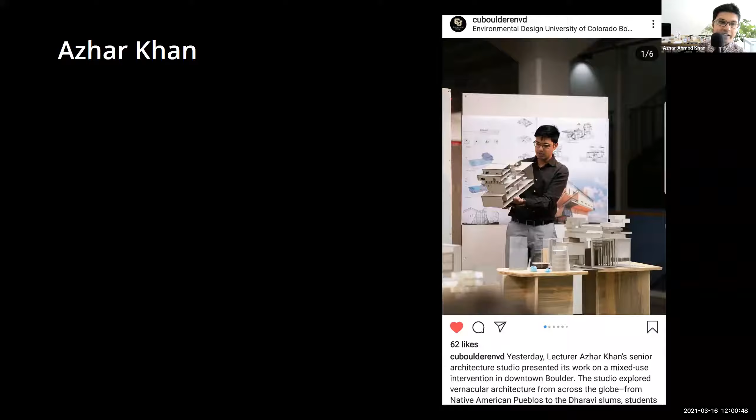Let me see, I think there's an image that's not showing here, but I'll show that in a second. So my name is Azhar Khan, and I consider myself a computational designer, because almost any work that I'm usually asked to do for any kind of project has to do with computational design. For years, that's pretty much all I've been doing. I got my master's here at UF in 2013. I used to be a TA for advanced digital, the very course you're taking right now. I think back in 2012 or so, I was a TA for it, so that was a lot of fun.

I currently teach architecture and product design at CU Boulder. So it's kind of weird, started off as a student and the loop has come back around. And yeah, so I teach design studio over here now.

I also have a lot of on-demand courses that I teach at a website called the Lineweights Academy, where people learn things like Rhino, Grasshopper, Ladybug, and other courses that I'm coming out with. I also train architects one-on-one, because there's only so much you can do online. So there's a lot of people out there who want to learn more about this information now.

I also have a coaching program where I spend about 8 to 12 weeks with someone, working with them one-on-one on how to actually implement some of this stuff into their firms. So it's not just them working alone, but how they can create teams, train other people, and make this part of their office culture.

And also freelance. So I get called from time to time to work on projects I've been working on for a couple of years, or even some new stuff every now and then.

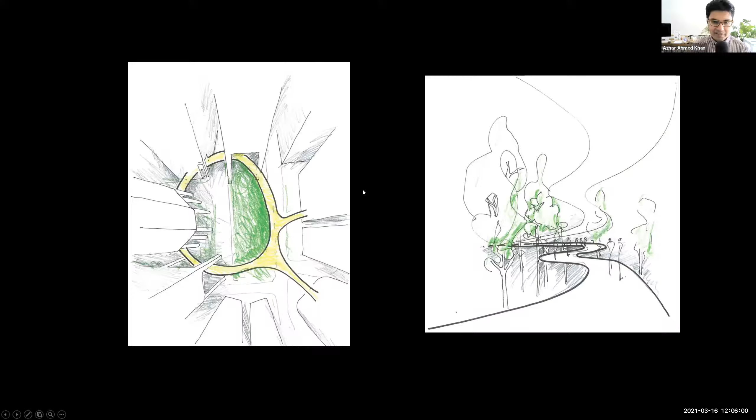And then there's a new building here and a new building here, which also has its own thing. So this bridge isn't just one straight thing, right? It's kind of going up and down. It has to navigate all these different heights in a very smooth way, while also doing all these pedestrian studies in terms of how wide it needs to be and how many people can actually cross through it every minute. There's a whole team that just studies the flow and movement of people. So it's a really interesting project and really challenging to do.

Being able to have a model that you can exchange with three different architects, the different landscape firm, the urban planners, and all this stuff, and be able to modify it and adapt to everyone's changes because everyone's designing exactly at the same time, right? There's a few things that are fixed, but a lot of things in flux, so you can't just design the traditional way. Here's an example where it becomes imperative that you use some kind of platform that allows you to make changes quickly. That's exactly why we use something like Grasshopper here.

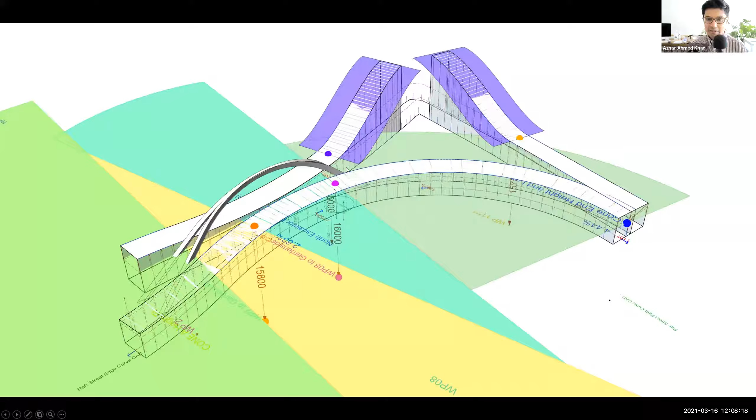Grasshopper pretty much controls the entire geometry for this full project, okay? From the ceiling geometry to where the deck is, the slopes of the deck, the heights and clearances underneath, inside, on top, where the arches are, how they fall — all of it completely governed by Grasshopper, right?

This is one of those projects where I can honestly say it would be impossible to do without some kind of computational design. The buildings that we're connecting to, some of them are done by firms that only work in AutoCAD. There's not a single 3D model, and all they have is 2D drawings. So it's this huge mix of different people coming together who have all different kinds of workflows, and we have to adapt in between since we're like that binder and connector between all of them.

So again, Grasshopper makes it super easy — not super easy necessarily, but way easier than trying to do it by hand — where you can set up ways to take quick measurements, identify certain governing planes, etc., to be able to set up your model so that you can actually create everything. This project from its conception all the way to, I'll show you what it looks like today, all of even the steel structure, all of the stuff that you see here is completely made and modeled using Grasshopper. Of course, you can't do everything in Grasshopper.

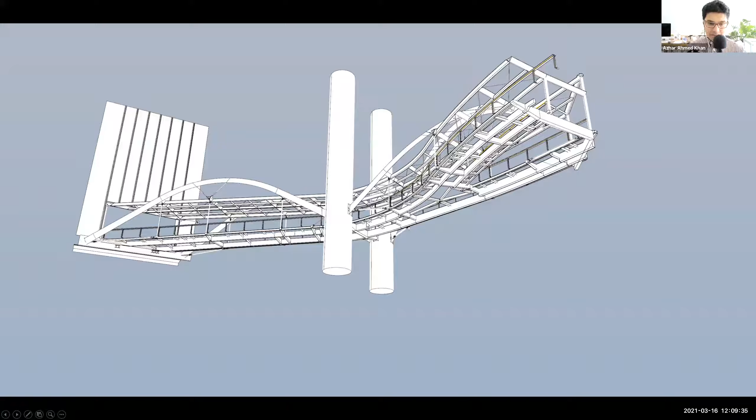You've got to obviously come in and do some things by hand. So besides these columns and the facade and some of the intricate connection details that you see, almost everything is done by Grasshopper to go from here, which is like the guts and the insides of this bridge, to this, which is the bridge then with its claddings.

Again, all of this geometry is controlled and can be adapted using parametric modeling tools, which directly translate into what's being constructed. If you are accurate and precise with your parametric models, that translates to the construction drawings, which then go onto the factory floor where people can accurately mill and cut out those steel pieces and weld them together.

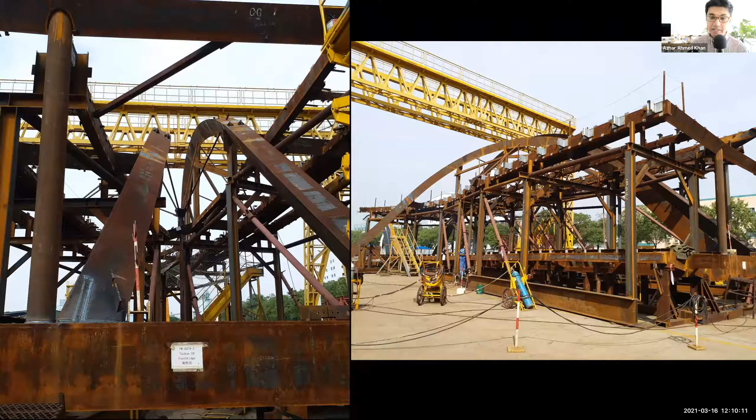Another thing to keep in mind is reality when you're making these things in the digital world. It's so easy to get lost in terms of shapes and forms, and you're playing and being creative, and that's great. But there's this balance you need to keep in mind: in reality, someone's actually going to have to build this. So understanding how things are actually put together and constructed becomes just as important.

I think I need to iterate here—for this phase of the project, we didn't use any BIM necessarily. I'm not saying that's a good or bad thing. Of course, if there was a way to use BIM for a complex project like this, that would be awesome. But back in 2016, 2017, we didn't have Rhino inside Revit or any of those advanced things you have now, even like five years ago. So we had to just use what we had, and that was Rhino. Turns out you can actually make things with Rhino.

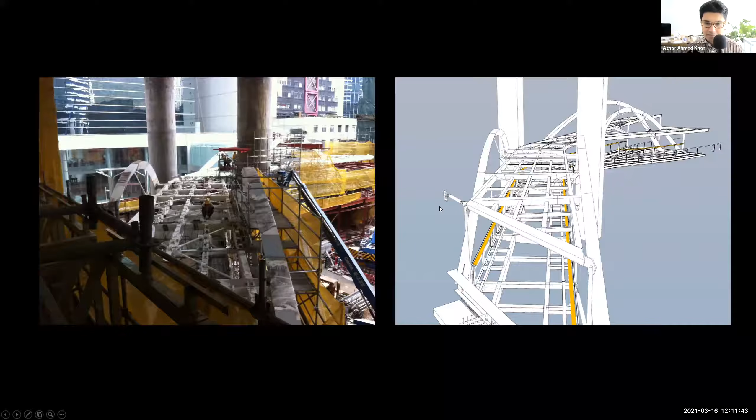One of the things about this project I want to focus on is the ceiling. The ceiling is actually a very interesting part of this project because it's probably the thing that took the longest to please the clients, the lighting engineers, and the geometric constraints of the site.

It's a really interesting story because the ceiling essentially—here's the bridge, here's a section of it, here's a handrail so you get an idea a person's about this tall, and you have all this structure on top that I showed you in a previous slide. You want to kind of hide this, but not just cover it with some cladding. You still want light to penetrate through, you still want it to tell a story, give a sense of directionality, and you want it to contrast with its surrounding to a degree.

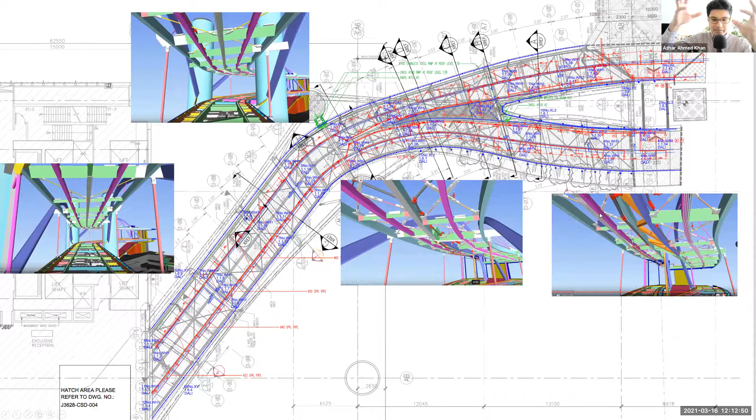So coming up with an idea for the ceiling was really, really challenging. Also because it's not just the structure up there—there's a crazy ton of services up there, from sprinklers you got to worry about to all kinds of other fire safety, electrical conduits, and all these things running up there. In a way, you have a really elegant structural system and a really elegant bridge that the contractors then fill with all this other junk. So how do you actually create something that can navigate this and negotiate between the clean look you want, without just covering it up, but yet allowing light and stuff without having the transparency to see all these details?

So we do what any architecture student would do, just start messing around and building models. Whether it's models like this—literally we took printer paper and started cutting it and taking our staples and stapling it together, thinking okay, what kind of interesting forms or shapes that behave really well with light can we put together. Just like you guys do in studio, putting a quick model together, testing it with light. And then, just as any design process, you keep advancing forward.

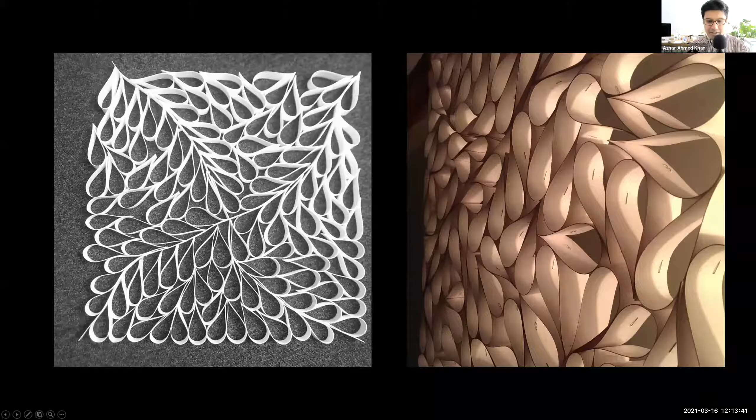So then the next step is, okay, let's create a parametric rationale of how to nest these types of shapes. Now here's a laser cut foam model that we put on a piece of foam core with some pins in it, and start to test that with light. Then just like any design process, you go a scale higher and test more things. We actually end up hand making a half scale model in the office and hanging that from the ceiling, trying out different concepts—here's one using these cylindrical discs almost, again just trying out different things.

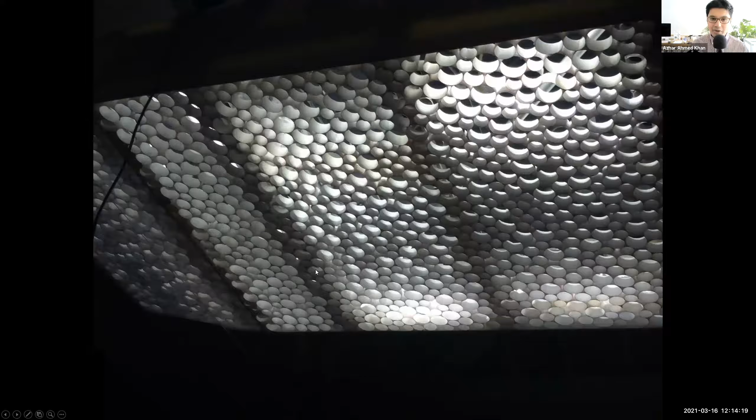There's always a balance between the digital and the physical. Just like any project, you can't just do everything digitally, even though this is such a digitally driven project. At the end, everything is real, or everything that's non-conceptual that has to be built is real. You have to attack a project from multiple different angles at all times. There were many other schemes.

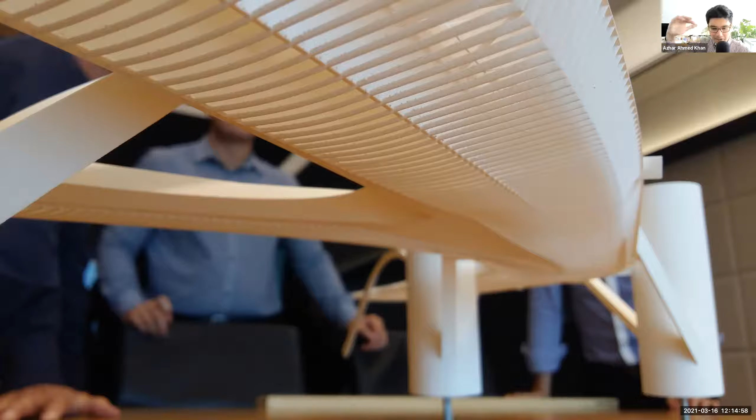The great thing about doing it digitally is that you could 3D print it. You can get an instant model right away just by 3D printing. So here's another scheme we were testing, these almost rib-like structures that go through. The awesome thing is, even if you don't have a 3D printer in-house, you can always outsource it and have someone else print it for you.

You can see over here, we're in Hong Kong, and this is like on the 64th floor or some crazy thing like that. All the other buildings are completely dwarfed. So again, testing, testing. In the end, we ended up with a solution that kind of looks like this.

I put this video together just to explain the process. This is a super complicated project because everything is linked. The arches connect to these roof beams over here. So if the arches move, the beams move. If the beams move, their connection to the bottom structure moves. If that moves, then it's like everything is connected.

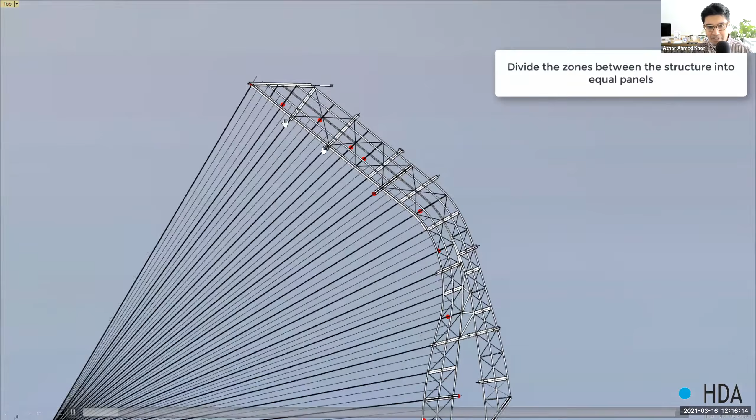It's absolutely crazy. But anyway, here's how the ceiling gets put together - you have to respect the spacings of the structure, and then you start to create this radial grid that goes in between each one. They have to be measured accordingly, and you create that over the entire span of the bridge, as you can see over here.

And then what you do is you create what I like to call an interference pattern. So here, for example, are just these parabolas. They're morphed between a straight line and a parabola. You can see the shape they take starts to intersect with those straight lines and create this Moire effect. So there's something in between happening.

You can see this happening, and we really liked that effect. We're thinking, how do we actually model the effect? Not the lines themselves, but that effect - how do we get that? And that's another big headache on its own. How do you actually do that?

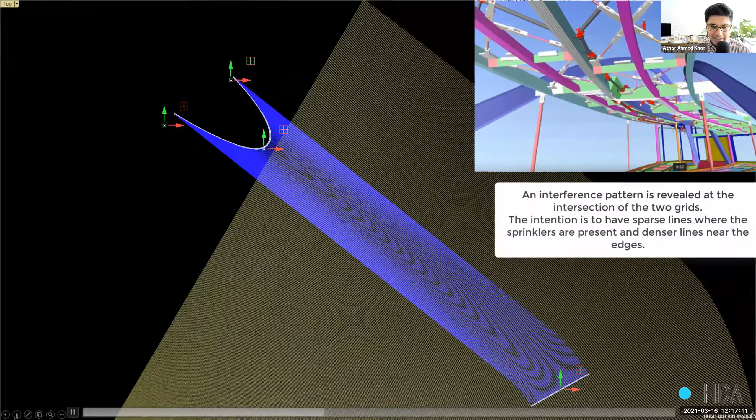So what you end up doing is you intersect both of them, and then I have to create another algorithm that goes through and starts to recognize those points and creates lines in between them. We can nerd out on this all day, spend a whole day just talking about one project. But basically the reason I'm showing you this is to show the variety - on one hand, we're looking at 3D modeling, which is actual forms and things like that.

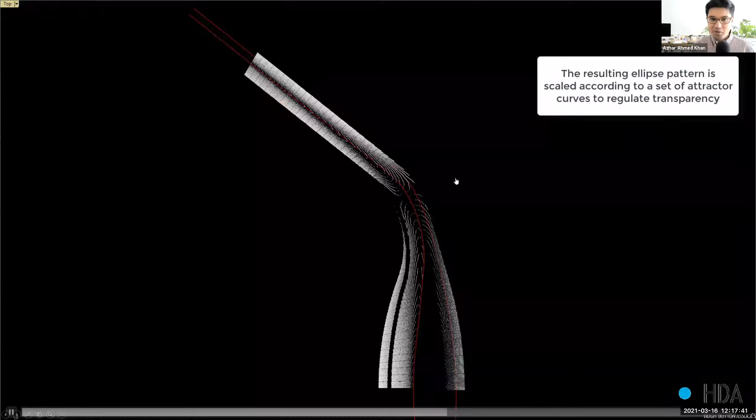On the other hand, we're looking at more rationalizing, training a computer to pick out patterns and the logic behind those patterns. You can see here the pattern's a little broken, but that's okay. In the end, we go through and create another algorithm to fix the broken pattern and all that stuff.

So it's a huge, fun process that in the end - I can start skipping ahead a little bit - because it has to be constructed too, right? I don't know if you guys ever cover developable surfaces. When you're building a model, especially even a study model, you understand you're limited to the physical reality of the material. You can't just build something of whatever shape comes into your imagination.

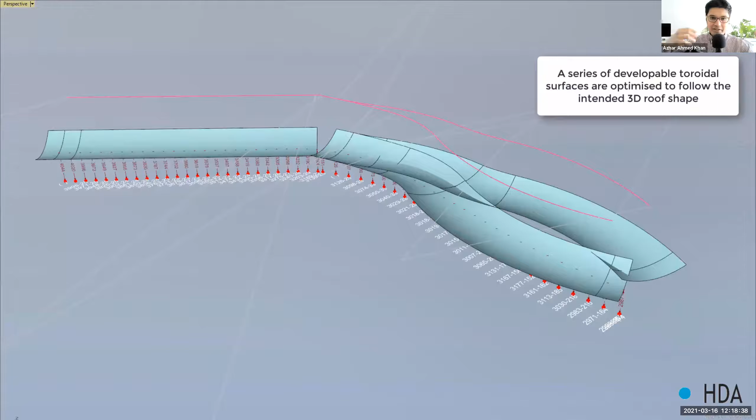If you had clay, maybe, but in reality, we don't really build things with clay. We build things with steel, we build things with concrete. And so even with concrete, the formwork still has to be made, right? So understanding what comes together—here it's a series of toroidal surfaces that we have to optimize to fit the bridge, because that's upon which we can place the ceiling.

And so those surfaces turn into what's actually the ceiling surface. And then we project that pattern that we created onto it. That's what actually creates the ceiling. So, working at multiple scales, you can see how some of these techniques can be applied, on the mega scale all the way down to something like just one aspect of the project, like a ceiling.

Oh, I think I accidentally quit that. Hold on, let me go right back. Okay, moving on. It says screen sharing has stopped for some reason. Okay, let me try again. Sorry, you might want to try again. Sure. Okay, I'm guessing that's working now.

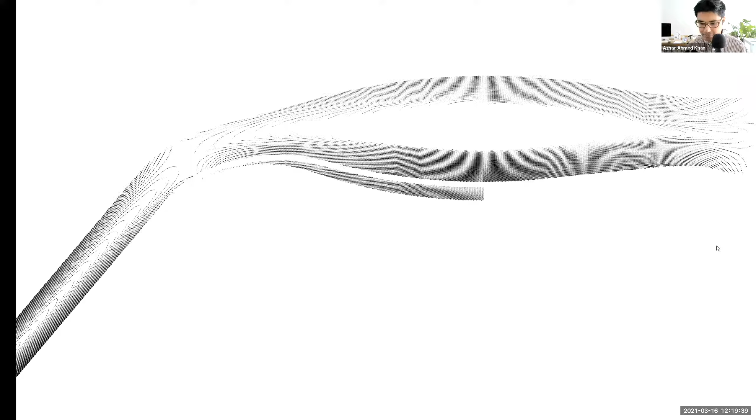Great. So then we just keep working on the pattern, aesthetically looking at it. And then, of course, it gets built, right? So you mill it out.

And then what do you do? Do you just go to the final project? No, you build another model, right? So of course you have digital models that you test. Here's some from the lighting designer, for example, for them to test it and make sure it's working on their end. You do 3D renderings with it, with V-Ray or Lumion, and more renderings like this. But then in the end you actually build a mock-up full one-to-one.

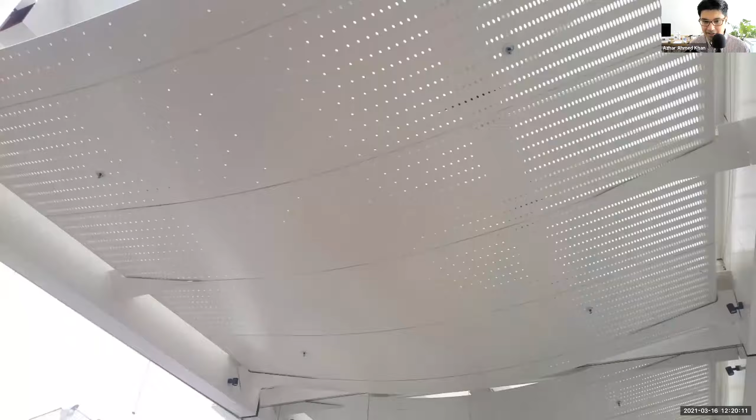You can see how you go from physical mock-ups—really simple shapes coming together with staples and printer paper—all the way down to a final prototype at full one-to-one scale with all the joints, all the connections, everything in there, just to make sure everything looks okay. And then testing it during the day, testing it at night. That process is something you guys kind of learn in studio a little bit, but here's an example of it actually being played out.

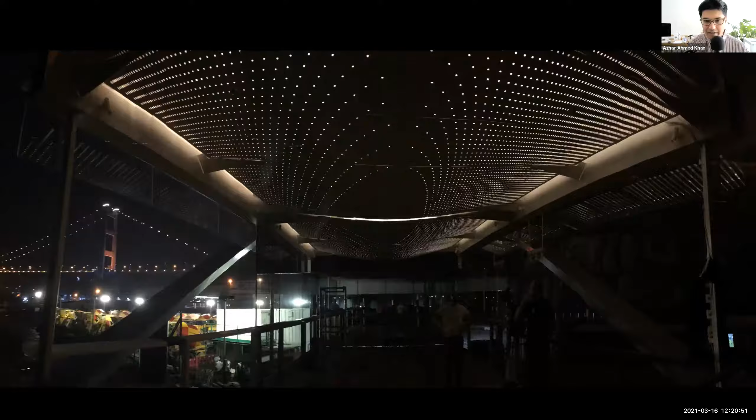And then, here it is actually on site, built 100% finished with people actually walking across it. Just to show you, also it's useful when you visit a project, to see that this is just one iteration. What you're seeing up here, there were 18 iterations that came before this—actually, this is version 18, so 17 iterations from those floral patterns to the discs to a whole bunch of other ones. So just understanding that any project you see out there is really just one snapshot of the design process, which probably had so many other versions to it.

Just for a frame of reference, how long did this entire project take from start to finish? These photos are from just before COVID hit Hong Kong, and in order to get this built and ready, it was about 6 years from conception to final. I'm hearing some other stuff, but anyway, about 6 years I'd say—the ground had already been broken, but the fact that you also have to rely on other people finishing their deadlines on time means everything has to be coordinated pretty well. But yeah, it took 6 years.

Here's some more photos of that. And this is only phase 1, so that's why you see some areas that are boarded up and the bridge just runs into an empty wall. That's just because there's more to come and that's still under construction.

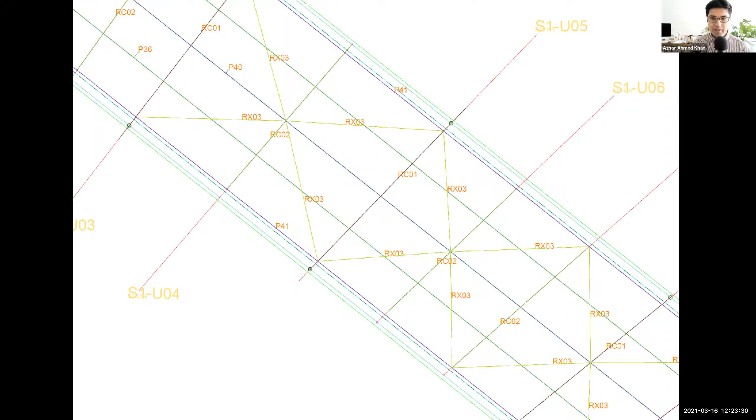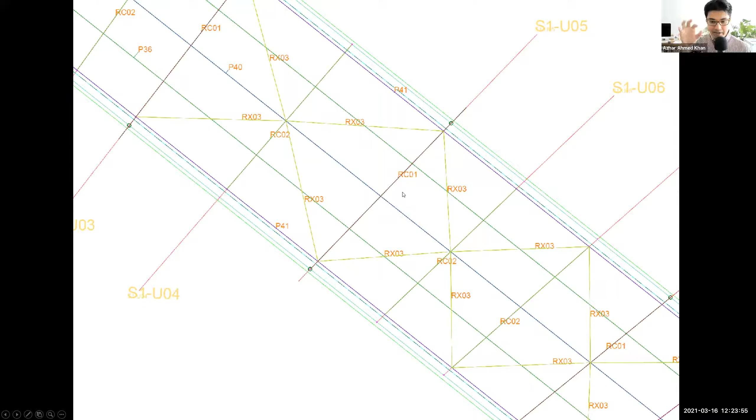So what I made was a way that you could import an AutoCAD file into Rhino, and Grasshopper would recognize the layers, and then recognize any text elements associated in those layers with the lines, and figure out what element that is. So it knows, oh, this is the X bracing, this is the cross beam over here, this is the longitudinal beam over here. And all of these things Rhino would pick up using Grasshopper and reconstruct the 3D model.

In Rhino, we have all of the profiles laid out in a nice little row. Then what we do is we tell Grasshopper, hey, you know that line you found? Go ahead, put this profile on that line. So we have some governing surfaces, and what we do is we reconstruct the entire model using an AutoCAD drawing. The AutoCAD drawing turns into a 3D wireframe, the profiles get applied to it, and that turns into this model right here, which is your basic structural wireframe in 3D. It has no details, no connection details or anything like that, but that's okay, because at least this drawing perfectly matches that drawing.

And that's really important because a lot of the changes that are going to happen, you're going to see when you start working, are going to happen in 2D in AutoCAD. Someone will send you a new plan, a new piece of geometry, mostly plan drawings, and you'll adjust your plan accordingly. But you may forget to tell the 3D people, or they may not get to it in time. Can you imagine if there was a change made over here—if one of these beams moved, or the spacing was changed, or one of the entire bays was removed?

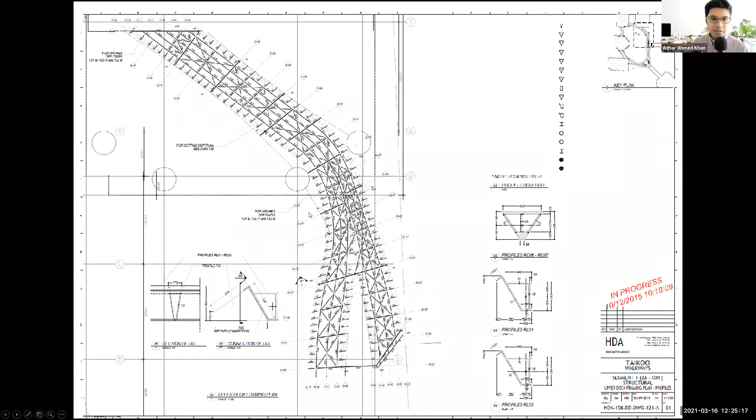It would take another day or two to reconstruct that 3D model, but being able to just say, oh, you made a change? No worries, just send it to me, and then you reference it again—boom, it'll just do this step, this step, this step, boom, you have a new model instantly. Does it take time to set up? Yeah, it takes time to set up. But if you can forecast, hey, we're probably going to be making changes for the next 7 months, do we really want to spend an extra 3 weeks just rebuilding the same model over and over again?

So a part of the job is kind of just recognizing these opportunities, because no one's going to come up to you and say, hey, can you design something that takes AutoCAD to Rhino and rebuilds the model? No, you'll just kind of recognize, hey, we have a problem here. Let's find a solution for it.

Another area that has a lot of choke points—you'll find in architecture there are a lot of choke points where projects just get slowed down considerably. One of those areas is especially when you're an architect and you need to send your model to the engineer. It'll take a couple of days for them to build their engineering model, because architects don't know how to build engineering models, and that's no fault of their own—it's just the way it is.

So one thing is, well, why can't I just have a Rhino model that automatically creates a structural model, and then the engineer, instead of taking days, will only take a few hours and have a model ready? And that's exactly what we did over here.

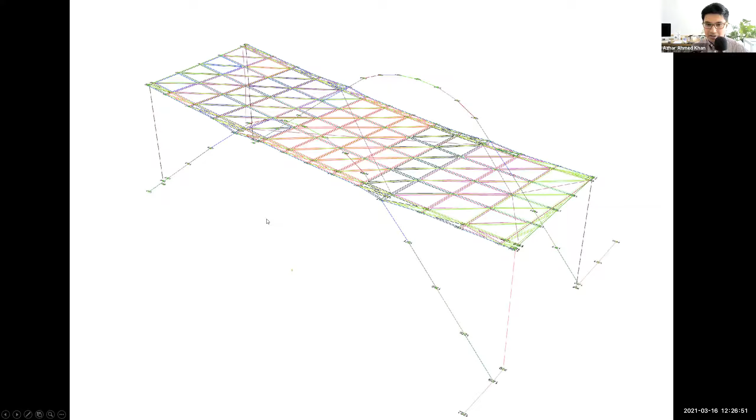And you can also use it to exchange things. So we can identify nodes, we can start to look at, oh, if this is deflecting too much, I can update this part. There's a whole system that we worked on with the engineering team, setting it up so that if we made a change, it updates their models.

If they made a change, it updates our models. There's a whole back and forth, like there's a whole numbering system that you got to keep in mind, but it drastically reduces the amount of time it takes to get an analysis done. Because in a project like this, you're working really fast. You want to be able to quickly test ideas. I want to be able to send 3 or 4 models to the engineer and get an answer on which one works the best. I don't have 2 weeks to wait for that answer. I want that answer by the end of today. So how do we do that?

You may have to spend a couple of days setting up the system, but once it's set up, things just become a lot easier. And you can go from a Rhino model to this model, which is what the engineer sees. This is a GSA model, for example, one of the industry standards that people use. You can go from one to the other in no time.

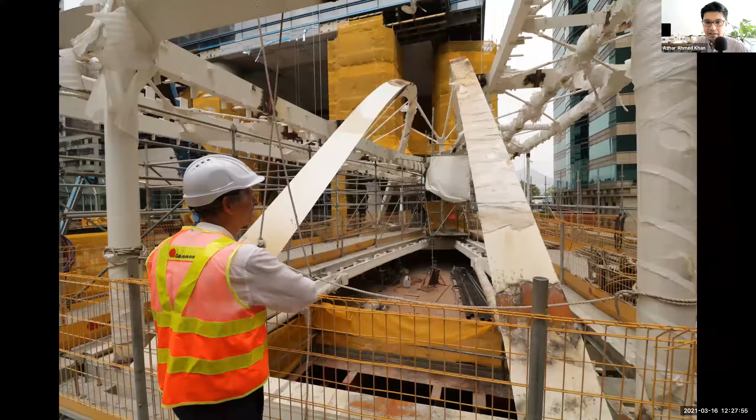And here are just some construction photos. Again, just to finish this off, here you can see those arches are welded, need to be a little bit cleaned up, but that's just what the site ends up looking like. Huge site, a lot of things going on. Again, the realities of construction, all these little extra bits and bobs that start to show up.

And from this, then to just before COVID, is this—the landscape is done. The building in the back is pretty much topped off already. The lobby and everything's available now. You can walk through this part. Some of the smaller bridge segments are completely finished and you can walk along those as well. Here's a view at night. Here's a view of the larger section at night.

Again, a very difficult project to do because you can see there's no interior columns at all. There's only a few of these hangers on the outside, that's it. As you're walking through the middle, it's really just light on the outside. And that's primarily because most of that load is taken up by these arches.

Okay, great. Let me see my time. Yeah, so I'll try to cover the others a little bit quicker so we have some time for questions at the end.

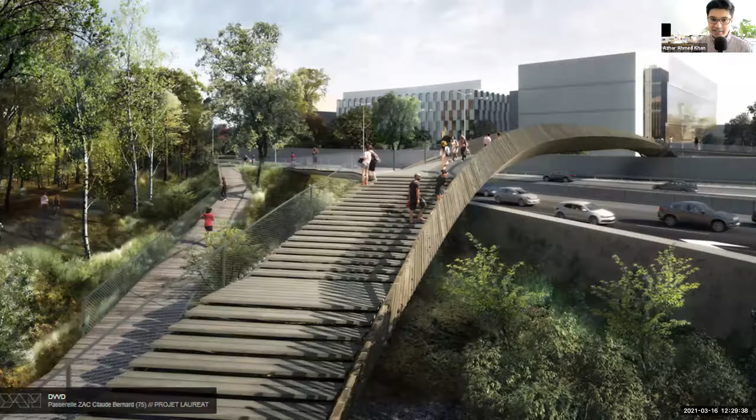One project I'd love to talk about is this project. This is in Paris. This is a footbridge that's going across the ring road of Paris. There's a giant highway on the border of Paris, and this is the very first pedestrian bridge to go over that highway. This is what it looks like, and this is what won the competition. It's a public project. This is what the architects designed, this wooden kind of bridge. It has a steel frame, wooden cladding, and these triangular kind of trusses on the outside. So it's like basically 2 triangles in space. If you can see this section, it's a little fuzzy, but there's 2 triangles that kind of travel in space with a walking deck in between.

And so the difference, yeah—sorry, this is on the periphery, right? Yes, correct, this is on the periphery. Yes, is it on the northern side? It's on the northern side. Yeah, okay. So if you know what the Jean Nouvel Philharmonic is at La Villette, this is just west of that.

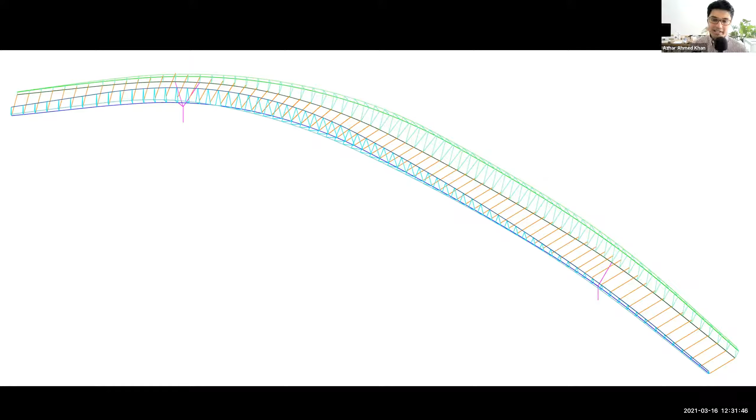So what do you do? You whip out Grasshopper and start taking that wireframe, putting some meat on it and seeing what this thing looks like. You start to get it more detailed, understand where the drawbacks are, what these joints would start to look like. You start to rationalize the entire thing. You start giving bays different numbers, agreeing that this point is called B, this is called A, this is called this, so everyone's on the same page, because none of this organization has been done before.

So Grasshopper becomes a way of actually visualizing this as a full parametric model. It also becomes a way of optimizing it, because just like in any design process, you start off thinking something's supposed to be made a certain way, and then you realize, hey, we can make this so much better.

If I had to count the number of welds here, there's hundreds of welds. And those welds aren't being done by a computer, they're being done by people. So the margin of error is pretty high, which means if you want a complex three-dimensional curve going from one end of the bridge to the other and keep it 100% accurate, I doubt you'll be able to do that.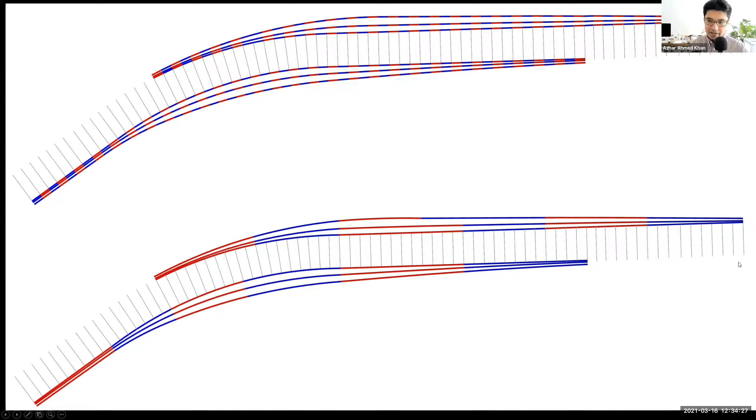These parts on the end are missing because the pipes get a little too close to each other. In a wireframe they're all perfect, but in reality two pipes will actually start to clash with each other, and physically it's impossible to build that. So what we do is turn that into what's called a box beam, built out of plates. But the plates have an issue too, because these are three-dimensionally warped plates, which you physically can't build. You can take a plate and twist it, but you can't twist it or bend it in more than one direction, and that's what's happening to each of these three plates.

So again, it's another optimization process that we go through, and you set up Rhino and Grasshopper and Galapagos.

If you guys haven't used Galapagos, you should check it out. It's pretty cool. I have some videos on this too that I'm not showing here necessarily, but the computer kind of goes through and tries to figure out what is the best configuration so that you can actually build this. And here it is on site.

Actual built piece made out of flat pieces of steel versus the warped shape that was the original. And how do you keep it as close to the original as possible?

There are also really little things that you don't realize how useful Grasshopper can be. For example, those wooden slats on the side of the bridge—according to the law, they can only be so wide, so someone with a soda can or something won't drop it on the bridge and have it fall through a slat onto the highway. Even something as little as that would take forever on AutoCAD or something, or even just natively using Rhino. Can you imagine measuring all of those?

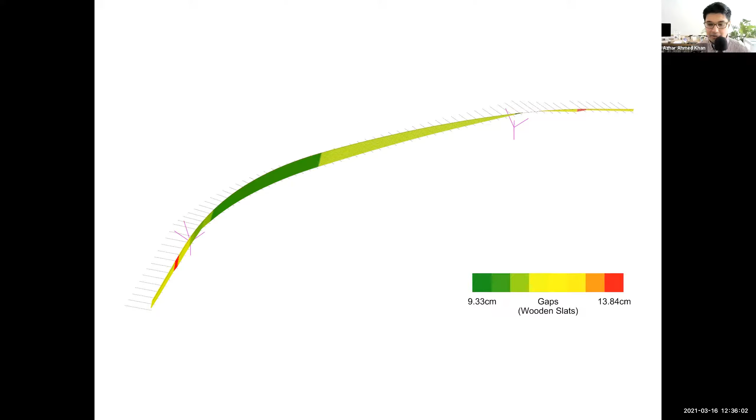But you can just quickly take all those curves, pop them into Grasshopper, and set a gradient or something to show, hey, here's the widest areas, here are the thinnest areas. Within like 30 minutes or so, you'll be able to get a solution that would have taken probably a lot longer using a traditional method. Again, really useful for making those structural models I was telling you about.

But Grasshopper has a lot of plugins, and some are really expensive paid plugins. There's a company called Geometry Gym—they come out of Australia, and they make all these plugins to go with some really interesting software. One of them is called Tekla. Tekla is used for steel construction. That's on the bottom right over here.

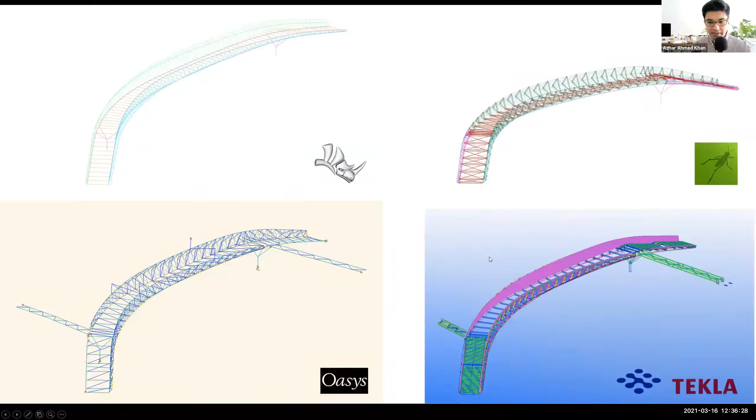So we create the entire model in Rhino and Grasshopper and transfer it to Tekla using one of these plugins. For example, remember I told you every single piece is unique on this bridge—there's no two pieces that are identical. So we model them accurately using whatever the logic is on the Grasshopper side, and it translates over here onto the Tekla side that you can see.

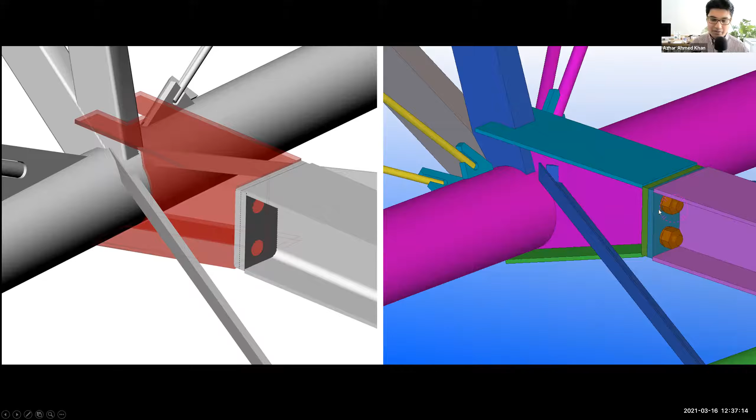Because again, we're not designing it necessarily—the design is done, we're designing how to build it now. So you start to see the pieces come together, and this is the final bridge. Everything in this bridge, except for this stair, that stair, and even some of these steps over here—every single piece, down to the nuts and bolts, down to every single profile—honestly, every single element you see on this screen right now is done in Grasshopper.

So for those of you who are thinking, well, Grasshopper—I see people using it, whether it's big or other people—the first thing you probably see is, okay, they're making some cool forms and things are happening at a mega scale. But Grasshopper can operate on many different scales, down to the nuts and bolts of how this bridge is put together.

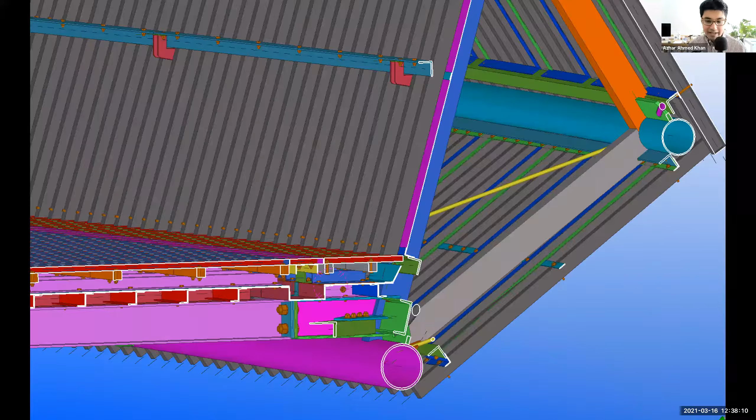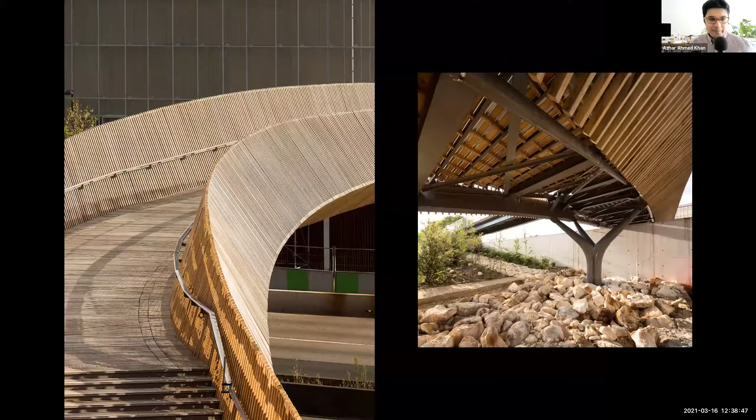This is the final product over here—you can actually go and walk on it now. I know I went from bridge to bridge, so I promise I won't end with a bridge, but here's another shot here. You can see all these connections, all modeled in Grasshopper. Every slat, its spacing, where it sits, the frame that holds the slats—all of that, again, all parametrically controlled.

I remember talking to you about this bridge, and I think there were two primary constraints: the construction time frame, and the fact that it doesn't land anything in the middle of the highway. This is a highway that can't be shut down, so you can't build this bridge in its place.

What's happening is everything up to that first step, this tri-column kind of thing with the beam, is where the bridge ends. So everything up to there was built beforehand. This entire bridge is built somewhere else and brought to site, laying on the side of the highway. Then they shut down the highway for a set time frame, like 4 or 6 hours, costing many thousands of euros. You can't go a minute over, every minute costs thousands of dollars. So the entire challenge is making 3 different pieces that when put together look like one continuous piece.

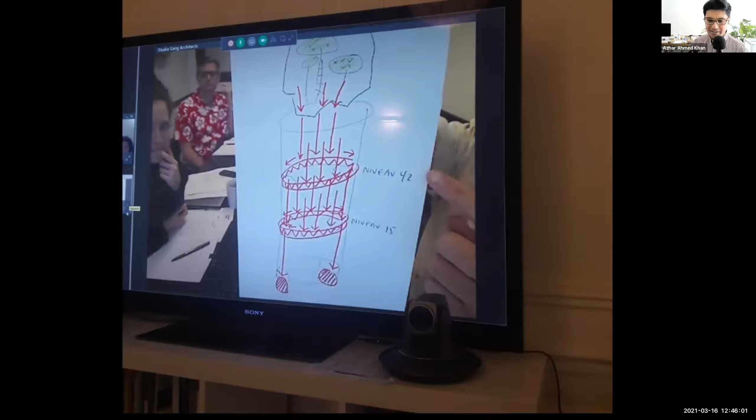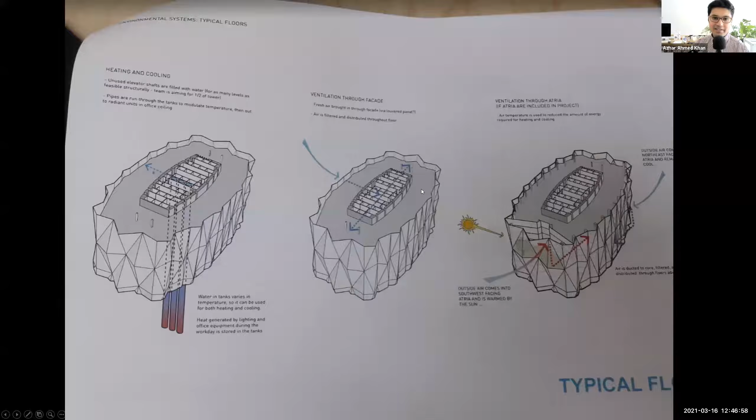This is their proposed tower compared to what I showed earlier. Let me briefly show you the earlier one again, so you guys remember what the old one looks like — that's the old one, or current one rather. And this is the proposal, the Studio Gang proposal specifically.

transversely, it's like a big zigzag that's kind of going around the building, right? And then they were going to disassemble the old facade and put on the new one, but with minimal impact on the existing tower, because they didn't want to demolish the tower. They still wanted to keep it. So there were some entries that built a new tower next to it and kind of merged two towers together. There were some entries that just built on top of the old one.

But before we get into that, guys, this is a competition, right? So competitions like this are extremely fierce, because this is at least like a $300 million project. And so you need to have every edge that you can have.

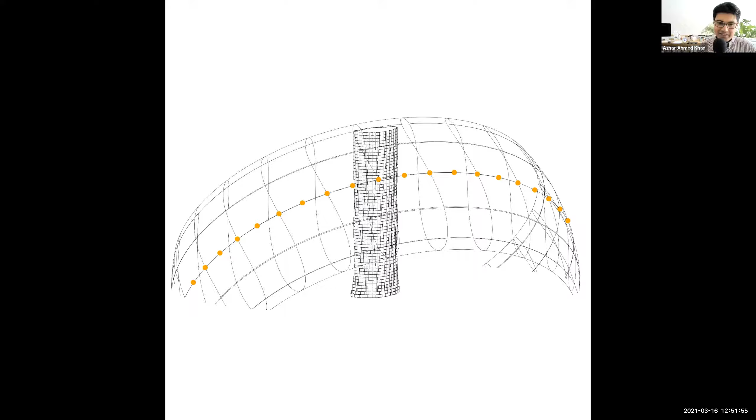If you have data, you can win. So take the model, pull up Ladybug. Have you guys started Ladybug yet? Yes, awesome, okay, so you guys have seen this before. Sun path diagram, pull up Ladybug, and you can start doing some analyses on the original tower, the existing one and the new one, and start to look at differences between them.

One thing I started to realize is that the self-shading potential - just because it's pleated, when the sun hits at a particular angle, it's actually shading the other half of the building in a way, because a pleat will actually block some of that light as it's going through. And you're literally looking at a Rhino screenshot right now. In Grasshopper, I'm literally creating rectangles with text blocks in them to create a graph.

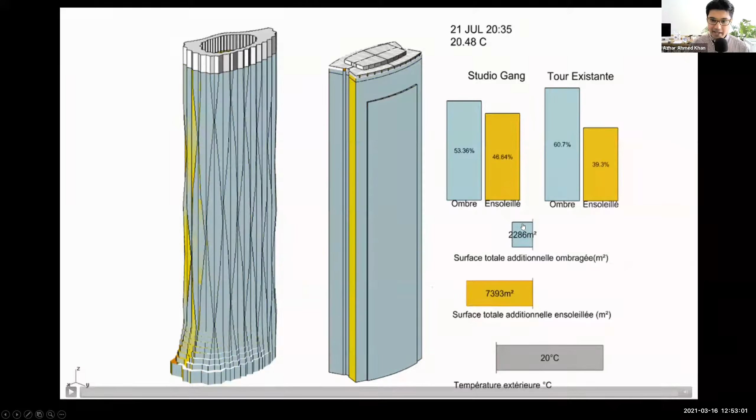So here's a little video, for example. And again, you guys can make videos super easily in Grasshopper, by the way. So here, I'm just kind of simulating the sun. And as it's going across, you can start to see, hey, here's the existing tower - how much of it is in the sun, yellow, versus how much of it is in the shade, blue. Just comparison. I know it's in French, but you guys kind of visually get the idea.

You start to see that for each of these frames, I can actually measure throughout the day what's happening. And then what I ended up doing is just plotting it. So here's me taking all those things, and from Grasshopper, you can export straight into Excel, create a chart, and you can start to see that the blue means the Studio Gang tower is working better. The red means that the other tower is actually self-shaded - the original one's self-shaded even better, which is kind of weird, but that's just how the data turned out.

So you can see between noon and 5:30, for example, that the Studio Gang tower works really well. So you can argue that, hey, in the afternoon when the solar radiation is much stronger, this tower works a lot better, therefore saving a lot of energy. And you can actually then take that and translate it into actual numbers, and come down to how many dollars you would save. So again, this is not part of the brief - this is not like Studio Gang or any.

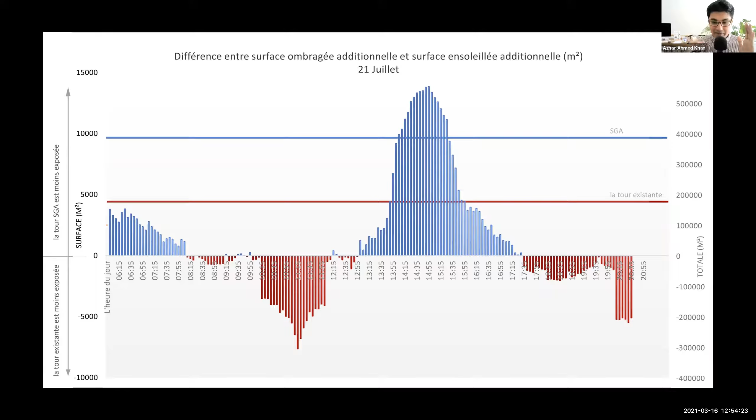Isn't the red part where, based on the orientation, the original tower is presenting its narrow side to the sun? That's exactly what's happening, because the original tower is actually indented a little bit. You'll see it over here on this one - you see that indent? So when the sun's in that position, it's actually hitting this angle a lot shallower, and it's hitting this one a lot more. And that's the only reason that dip is happening.

Yeah, you're absolutely right. So again, looking at other opportunities - part of the thing is you guys have to look for questions that no one's asked yet. So for example, in Europe, summers get really hot, and a lot of Europeans don't use air conditioning. They usually open their windows. But in an office tower like this, which is a completely glass clad building, you can't just pop open a window - that's really not an option.

So what you do instead is do the opposite. If the sun's entering your office, you kind of pull the blinds down to block the sun. Now, what happens in the original tower, the existing one, is if the sun's shining over here, guess what - every single office over here has to shut their blinds. Every single one. So you have no view.

So you can argue that if you don't have a view, you're not as productive, you feel like you're in this weird environment, you're on the nice 40th floor of this tower, and you can't enjoy the view all morning because the sun's coming in.

Versus if you have the pleated version, if the sun's coming from here, for example, where my mouse is, that's okay because I only have to shade one of them. Only on one do I need to pull the blinds down, the other I can still leave open. So you don't need to shut both, only one, unless the sun's shining on both. If the sun's coming on this side, it's blinding one side, but I can keep the other view open.

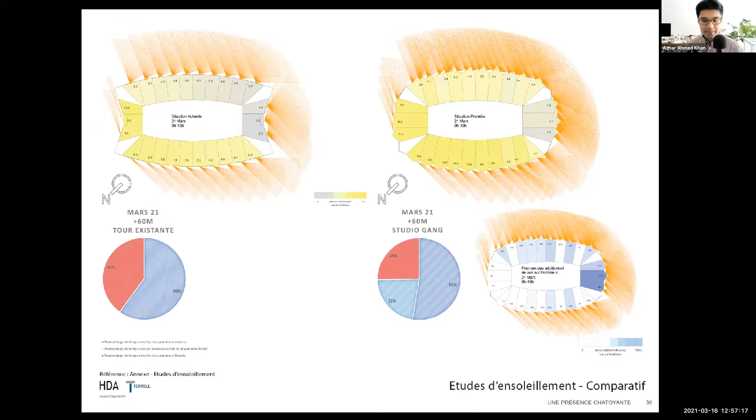This is good timing because you guys are in ET right now, and I think you've been covering some of this. If you've covered daylight factor and things like that, you could do that already now with Ladybug, it can calculate some daylight factor. If you've used Diva, it's pretty cool, you can probably get a student version for free. This Velux tool is free, and you can put in your studio projects and show how much natural light flows into the space, it's pretty cool.

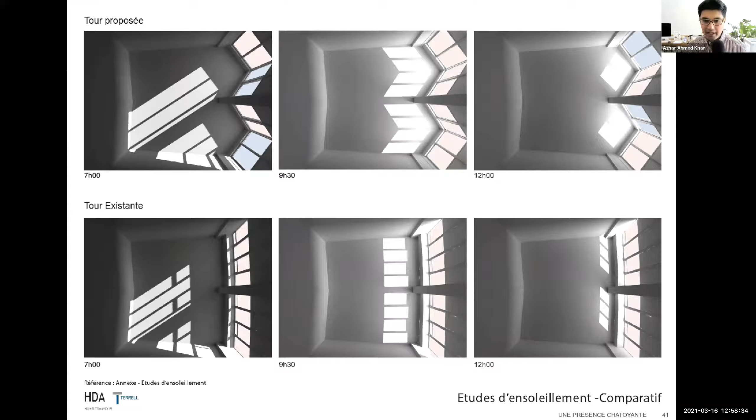So that's just on the facade part. And then comes this other thing that's on top, which is what we call the mushroom. We call it the mushroom, it just caught that name, I don't know what the original name was, but everyone just started calling it the mushroom at some point.

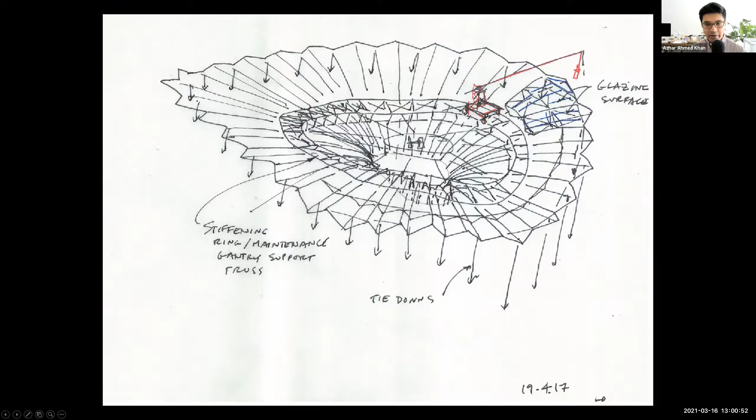Where do we stiffen it? What does that facade actually look like? Because there's no way it's one piece of glass—that's just not physically possible. It's okay for a render, but in reality it's got to be multiple pieces. How do they come together, and what kind of joints do they come in between?

Let's sketch 3, 4, 5, 6, 7 options. Let's model them, let's test them. And this is what that looks like from the top view—this is the plan view.

Again, I know this is going to change. So I'm looking at this and actually remodeling this mushroom, because this is my model of the mushroom—whatever they gave me is one thing, but I have to take it and rationalize it. I have to make sure a fin can't just randomly land on the edge, so re-looking at it and using Grasshopper to parameterize it, so there are guaranteed fins landing on each of the nodes you see on the facade.

So I'm using Kangaroo, for example, to kind of relax that shape. Have you guys used Kangaroo at all? Not yet, but probably in a week or two. So Kangaroo is like a physics simulator—you can relax meshes and surfaces.

So this mushroom shape that was just kind of built by maybe some intern at Studio Gang now actually gets rationalized, and we put some geometric and structural logic to it—like this should be almost a catenary arc to be able to hold these forms.

Testing out the facade surfaces on there, trying to get a more holistic look at what this is probably actually going to look like, rather than what's just sketched up for a competition.

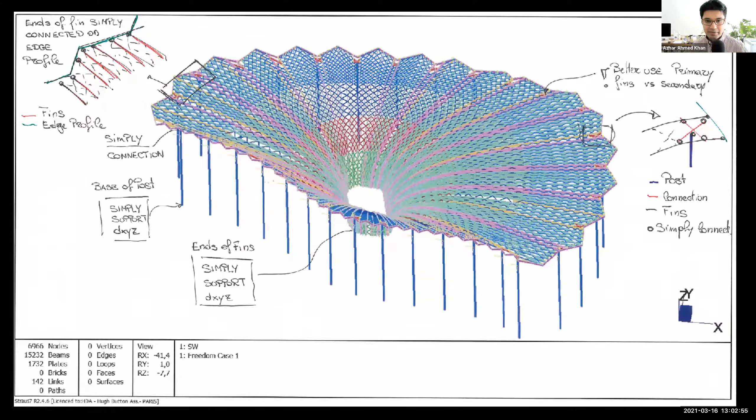And then having a Grasshopper model where you can actually make those changes, instead of rebuilding all of it—you have a few parameters you can tweak, bring some fins closer together or further apart, adjust spacings or bracings wherever they need to be, densities, etc. These are just screenshots from the engineer's perspective.

So again, all the examples I've shown you so far are just to show you a variety of uses that you can have for some of these tools.

At the end of this competition, the final 7 entries actually had a big exhibition—every entry built really big models for it, and it was in the Arsenal. If you guys ever go to Paris, you should go to the Arsenal, which is a really great architecture exhibition area. They do a lot of different types of exhibitions, but a lot of architecture ones, and they had some really amazing exhibits over there. So the final 7 were brought over there.

Anyways, guys, those are the 3 projects I have for you. Professor Huang knows I have tons of other slides and things I can show you—if you were thinking about a project I've shown the class before that you want me to bring up, I can always pull up that presentation. But other than that, that's what I have for today, and I'd love to answer any questions.

Maybe the climate ribbon, since it's close to home. Oh, the climate ribbon—yeah, did I have slides on that? Let me just check real quick.

And by the way, if anyone has questions you want to think about or throw out there, you can. What was the final structure you decided to do for the glass for the mushroom?

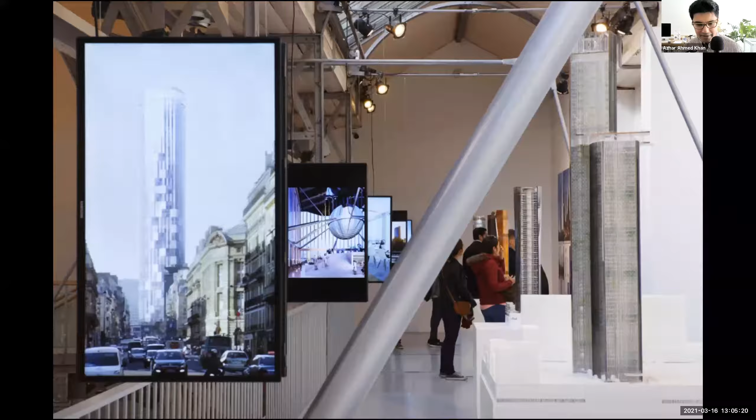Yeah, sorry about that. Let me show you. I think for us, the main thing was if you're going to sit over there and have some nice clear visibility, you can't have mullions in there. So we were actually able to find a way to make glass like we have in Hong Kong right now, a piece of glass that's about 12 meters high on the facade of a skyscraper, almost 40 feet, about 3 stories or so. So we know we're able to do that in Hong Kong.

The French in Europe is a little bit different with the rules, especially the wind load. Each country has a different code on how you can treat those loads, and the wind load in Paris is a lot higher at that altitude than in Hong Kong at street level. So we were still able to get really large spans of glass with no mullions in there, taking most of the loads through the columns and through a few stiffeners that ran along the top.

And then it was a bracing system. Have you ever seen one of those tensile bracing systems, like spiders on facades? Maybe at airports you've seen them, like cable stay facades. Yes. There were a few of those, but way above any height you would view at, so no matter where you sat, you'd still get that nice clear view outside.

So basically they were large pieces of glass that all set on top of each other and were held together by those spider thingamajiggies, which ran vertically. I can find those details for you if you're interested in how that was put together - I have the whole facade sheet with me. But in the meantime, while you guys are thinking of questions, let me find that, because I'm on my CU computer right now, so I don't have access to all my PowerPoints, but I'll see what I can find.

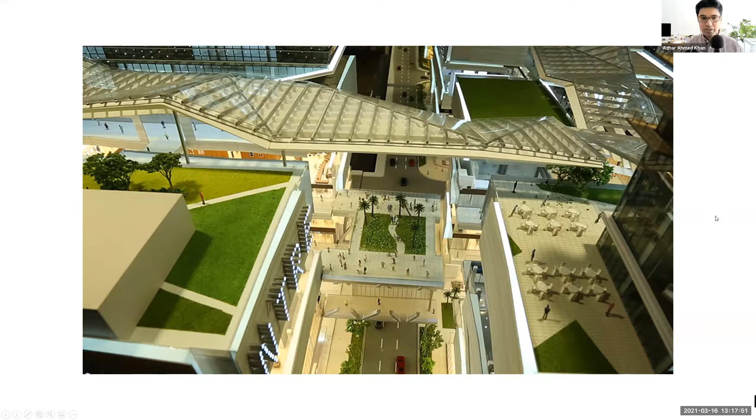So here's a model, for example. Next slide. And here you can see some views, and here's a section as well, just to show you the scale of this thing. Those are people in the scene, and this thing has got some meat to it, it's pretty big, not a small undertaking. It's a pretty giant project. Next slide.

And here you can start to see the 3D model. The way this was done is each of those blades—you start to see those red blades going through space—their angle is actually determined by how much shading it can provide with respect to the sun at that given time.

So this thing is actually moving through space, keeping the residents cool while it's doing so. Not residents, but visitors to the mall, I guess.

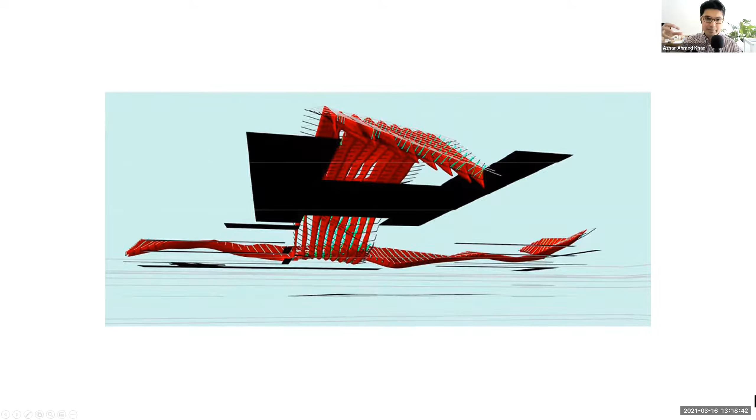Next slide, please. So what we do is we know the basic shape, right? Because Arquitectonica has their towers here, the mall is here. So we kind of know the parameters of the site within which we're working. And then it's a matter of throwing a grid on this and looking at all the different angles the sun starts to come from.

And you start to generate these really interesting diagrams which look at the angle of the sun, the intensity of the solar radiation at that time in that location. And as you map it, you start to get these kinds of diagrams showing up.

And that's what then starts to inform what the blade should look like, or even if there were blades in the first place, because there were many different strategies that came even before the blade showed up.

So you can see over here, we started to think, okay, we're probably going to have some kind of structural system on the top. You can see these transversal beams sitting up there. And then we took points on each of those beams and started to look at where that sun vector is going.

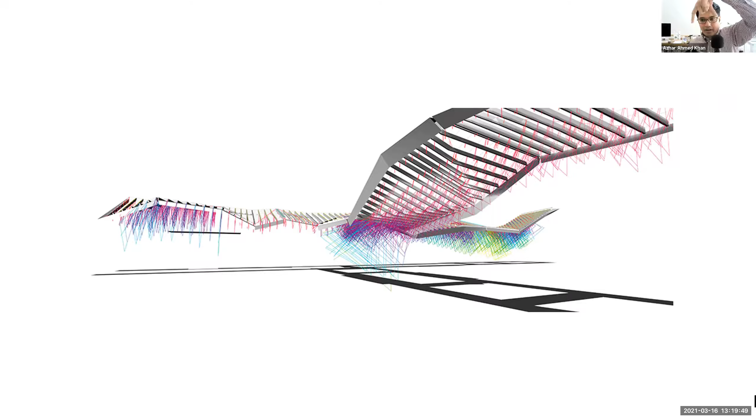What is that cone that it creates? Where is its shading potential existing?

You'll see that in some areas it works better, probably because there's a tower already blocking the sun from that angle anyway, while there are some areas that are almost always exposed to the sun.

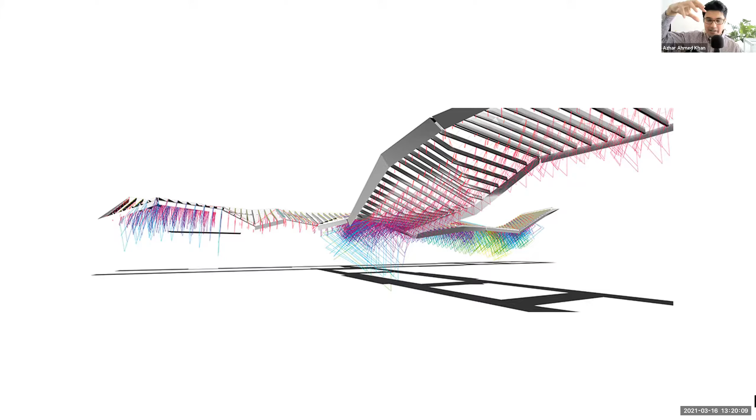And so you start to get this topographical color map of the area in 3 dimensions, from which you can start to design the blades.

Next. There also may be a video in here somewhere. So essentially, there are multiple levels to where the pedestrians can walk.

And we actually came up with a 3-tier system. There are areas that—can you go to the next slide? Maybe it's on the next one.

Yeah, so there are actually different zones that you have to consider. So for example, the facades. If you guys know from your ET class, the reason you have to air condition your home is because it gets hot.

The reason it gets hot is because the solar radiation comes into your home from the outside. How does it come in from the outside? It comes in through the window, right?

So the radiation goes through the glass. Something happens to its wavelength, so that when it comes in through the glass, it can't really go back out as easily. So when it comes in and lands on a surface, that radiant energy gets absorbed, and that's how your home gets warmer.

So we had a zone, and we said, okay, we should design this such that there is no single piece of storefront—this is a mall, right, there's a lot of storefronts everywhere—that ever sees a ray of sunlight. Okay, so we had differences.

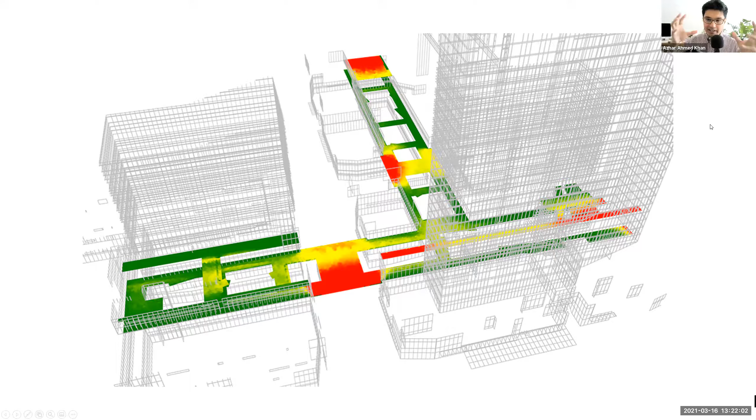CR, anytime you see CR on these slides, that's climate ribbon. So shops and shelters only, that means those are only direct rays.

Another interesting thing you can do with Ladybug is ray tracing. When you do a radiation analysis, it's just looking at the direct incident light, but with ray tracing you can also bounce light off surfaces. You can add scores then, like a score of 1 means it's direct light, a score of 1.5 means it's direct but there's also light bouncing off another surface, taking only one bounce to hit there, so its score goes up to like 1.5 or something. There are ways you can definitely do that.

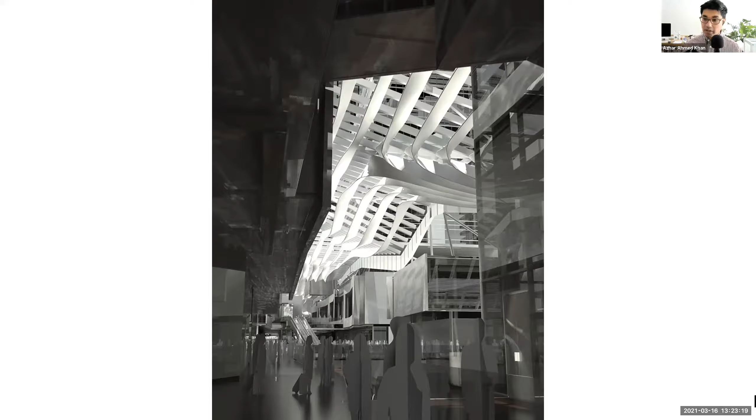Then the ribbon language starts to come together. These are initial renderings - they had a Revit model at the time, and we were working in Rhino. So this is their Revit model with our Rhino model inside of it, just looking at the aesthetics and the scale. This went through a lot of different iterations.

Again over here, just a different view. This was done I think around 2012, almost 10 years ago, so obviously not like Lumion that you have today, but nonetheless fairly accurate to what you see in Miami if you go there right now.

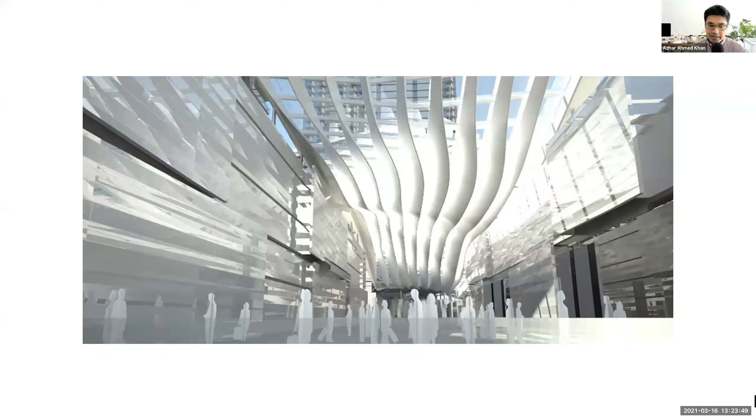Here's just another view of it, and these are really big. It may still be worth it for me to send you that presentation, Professor Huang, even if we run out of time here, just so you can show some of the construction photos and the scale of this thing. Remember, these are fabric blades - there's a fabric blade wrapped around a steel truss.

I think that's all I have on this one. I'm still going to look for it while we answer questions, but I'm happy to answer other things you guys have.

Any other questions? Either yell it out or put it in the chat.

Oh, I found it, by the way, if you want me to share my screen briefly. Sure, yeah, okay.

So here, for example, I also taught at City Lab for a semester while I was there, so I'd fly back and forth to Orlando, and we actually went to Miami with the grad 2 studio to see the project. We covered it there, but I'll go through this one here because it's another super interesting example.

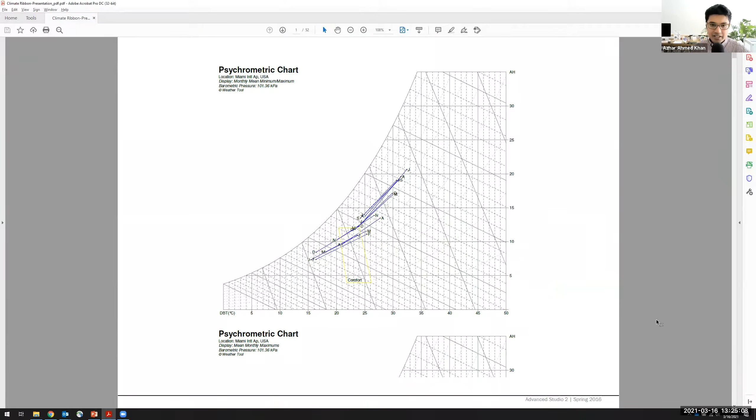The other thing not in that presentation has a lot to do with the wind. Miami is a coastal city with trade winds always coming from a particular direction - I believe it's the southeast. We can check over here - yeah, south-southeast, that direction is where a lot of the prevailing winds in Miami arrive from. So it's also about harnessing those.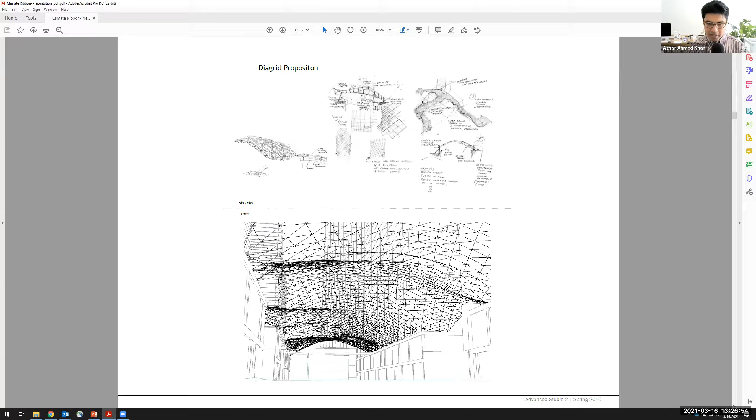Initial design sketch, parti sketch, to the first kind of Rhino models and what that would look like. Same thing over here - here's the sketch, here's the actual sketch from Hugh versus the Rhino model of what's made. For each of these, just looking at it from different views - this is probably Rhino 4 at the time. Again, grid shells, diagrids and vaults, more examples coming through, these kind of waffle systems.

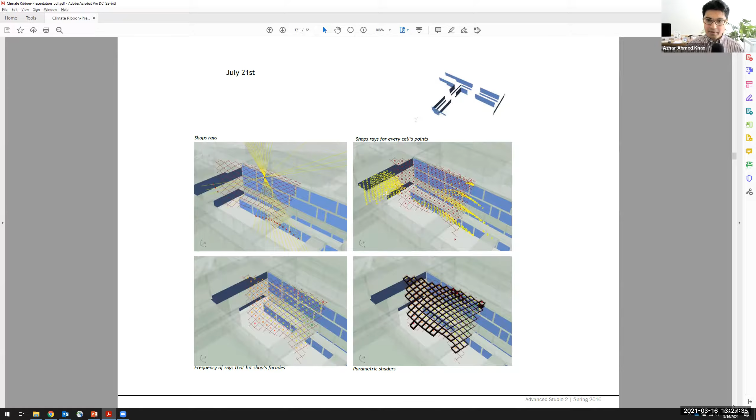Again, all of these are getting tested, right? Because you don't really know what it is. You start to narrow down to your solution. No one wakes up in the morning and goes, hey, I know, it's climate driven, right? It never works like that. You kind of have to go through like 100 ideas to come down to the one you really want. And again, all of these are being tested in a similar way. Like we're looking at a grid shell, for example. Where's the light coming from? How much light does this actually block? What is its effect on the surrounding?

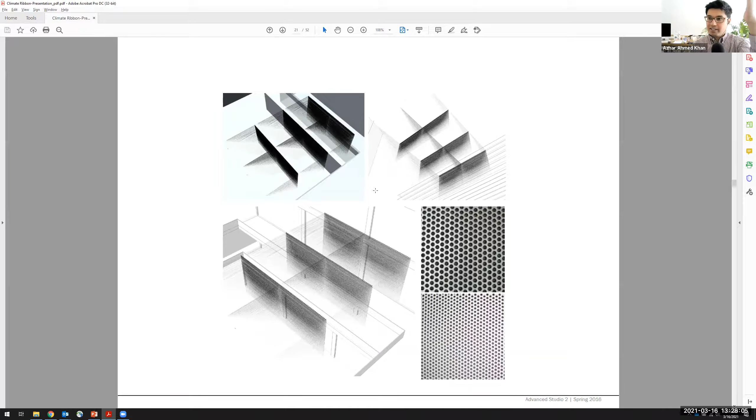I can kind of go through some of these. Just some more images. Again, we were looking at like light curtains almost. So why is it something that's horizontal? Why can't it just be vertical and just float vertical planes in space? Those vertical planes will start blocking the light. Maybe they're these perforated hangings, right? Because how often is the sun directly above you? Most likely it's at an angle. So why not use vertical planes?

And then again, looking at where that wind can come from. So wind also became a large part of this. So I actually came on board after this was already built. So I did most of the post wind analysis on this. So once it was built, to actually take the as-built model, put it in our simulation, kind of see like, does it actually work? Does it actually bring the wind through? And if you go there, if you go to Miami, go there during the afternoon, go there during the morning, you'll actually feel the wind over there. You'll feel a lot cooler than it is outside. I mean, now it's March, but it's going to get warm soon. You'll definitely feel it in the summer.

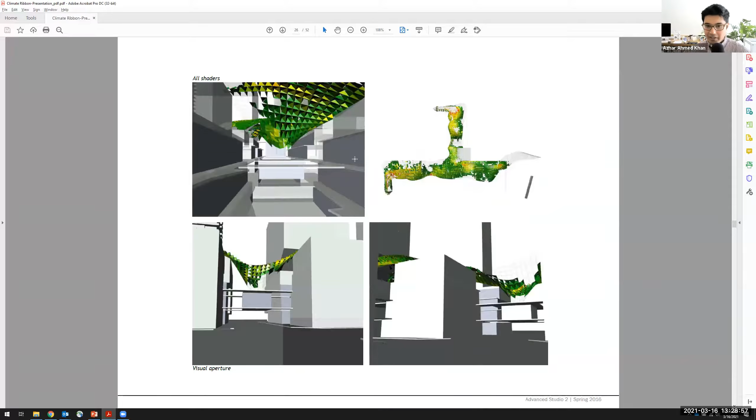Again, you can see like all this stuff is grasshopper work. It's a Rhino model in the back with a lot of grasshopper and ladybug analysis work going on over here on all kinds of different models that I can quickly go through before we arrive at this idea of blades. And you can see the first version of the blades is very different from what you see at the Brickell City Center. It's like very wonky, just an initial kind of sketch, like what would blades look like in a space? And slowly over time, you start to see like, hey, this idea may actually work, why not use blades?

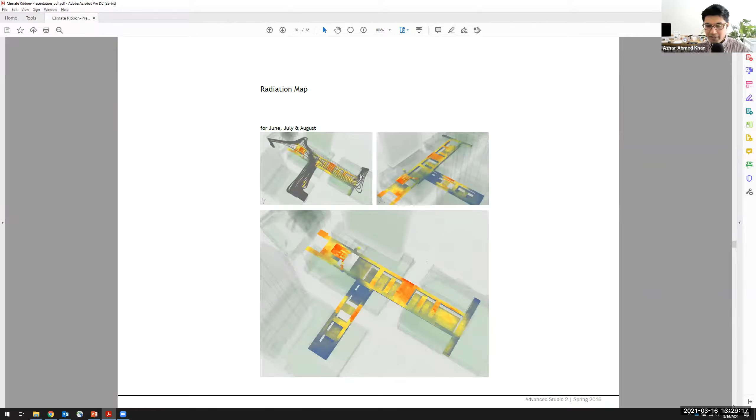Testing points out on the blade, you start to get some really beautiful diagrams coming out of an analysis like this. Drawings like this are just intense. But they kind of show you that we're not just designing based on nothing or just pure intuition. It's a balance between your design gut and what science tells you.

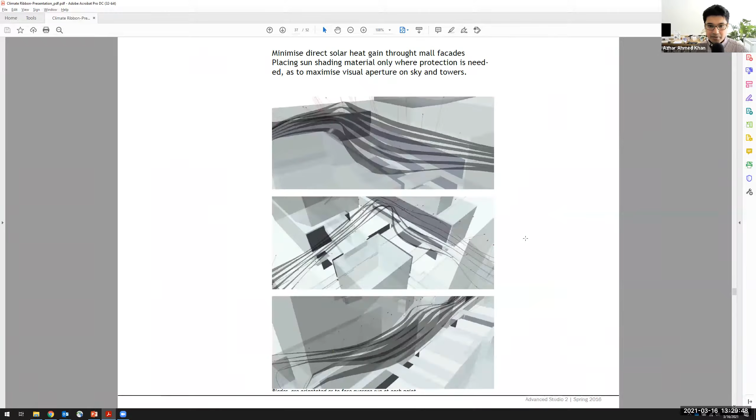And just kind of going through some more iterations here. Here's some more of the blade works. Again, many different variations on the blade design, initial renderings and tests in Rhino, just to kind of look at what it is. And you can see here the result, like with it, there's almost no light falling on those storefronts now at all.

So without and with, and you can see the difference there. So that's a good argument too, to say, hey, all these stores will save so much money on their air conditioning because guess what, there's no direct light falling on them.

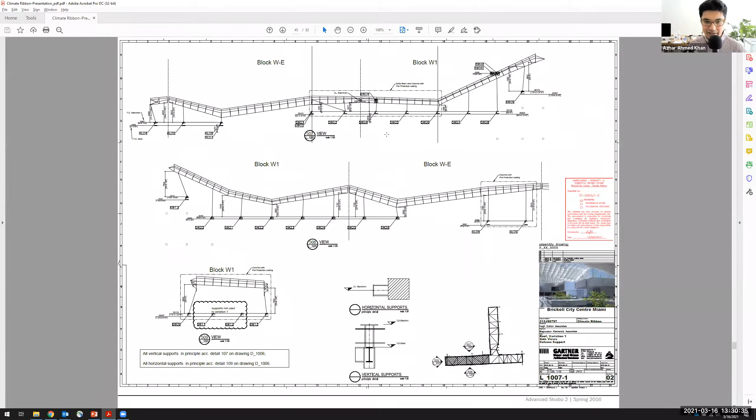So the first version of the blades started off really straight as well, as we started to rationalize it and actually think about construction. Quickly that went away and we realized, okay, if we can make it curved, we should try making it curved. Some of this stuff was very specific to Gartner, in terms of rainwater, like where would the rain actually go and collect? How would you place gutters? All those little real things that you got to think about.

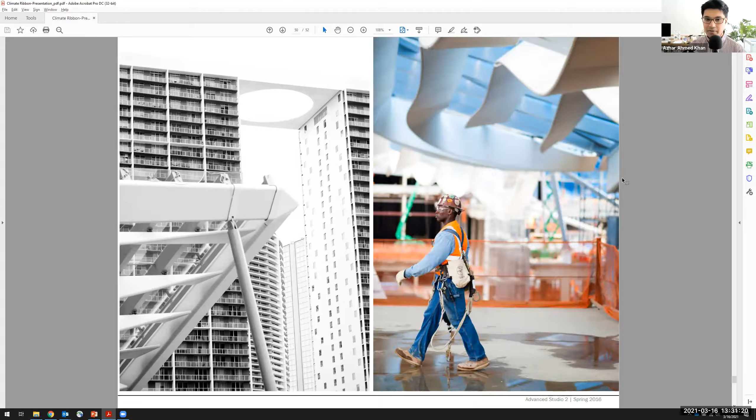How do you actually connect to the existing mall structure from Arquitectonica? And here you can see under construction. So there's someone standing here, and you can see the size of the blade. It's taller than the person. These are huge. You don't notice it so much when you're under it because it's so high above you, but these are really, really big pieces. So these are some photos from on site. This is probably wrapping up to be completed. So this is probably 2015, when it's just about to open. I think they inaugurated 2015. Some more photos from site here.

There's also, I think it's worth sharing this. Brickell, let's just Google this.

So again, parti diagram, right? You guys know all about that now. You can see how the connection between the parti and what you actually make is so important, and how the parti can really set you up for a project. I think what's interesting through your presentations is we start to see the iterative process, that they didn't arrive at this right away - there's scheme 1, 2, 3, 4, 5 different things until they slowly start to narrow it down. It gets more resolved over time. For every project there's so much information behind it that you don't get to see necessarily, and I think it's important to be able to show some of this.

So there's a question - what's your favorite Rhino command? Depends on the day, I think. But one of my favorites is SetPt, which I don't think people use enough. So useful, and no one ever uses it.

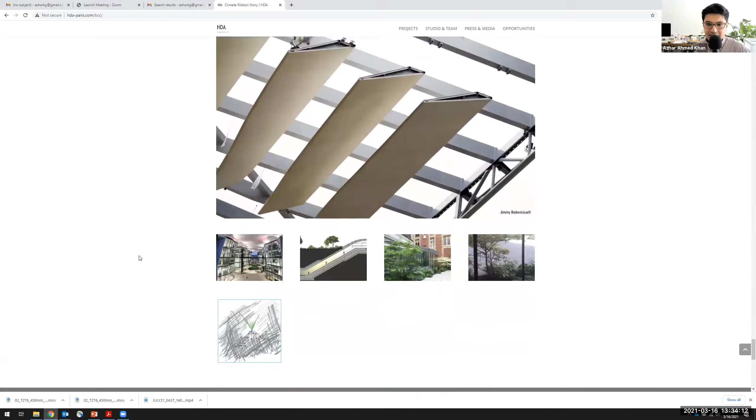There was a question - what's your favorite project that you've worked on? Oh man, that's a tough one. I think for now it's the Taikoo Footbridges in Hong Kong. That's the one I've worked on the longest, the one I've visited the most, the one where I know so many of the team members - everyone from Paris and London and Hong Kong, and it's just crazy. I think that's my favorite so far. Yeah, I would say so.

Michael's asking how many of the constraints or goals of the project come from the client, and how many came from you all - or in general, how did you decide the goals of the project? So I think design goals come from us, and a lot of the constraints come from them. So there are constraints you can't control.

That's another insane one, this is a photograph by the way. I can show you some work on that too, not on this computer. Speaking of - sorry, see, I'm getting sidetracked already. Constraints. Let me go back here.

There we go, okay, so they have it up here. For example, of course there's the landscape architects who will say, oh, you can't have columns coming down in these areas because when we want someone turning this corner, they need to be able to see this. Okay fine, we'll take your stuff into account and deal with that. Then the architects will say when they enter, they have to enter at this angle because the lobby is oriented this way or something. Okay, we got to worry about that. The client will mostly say I like or don't like this, or this is too expensive - how much will it cost? Those type of things.

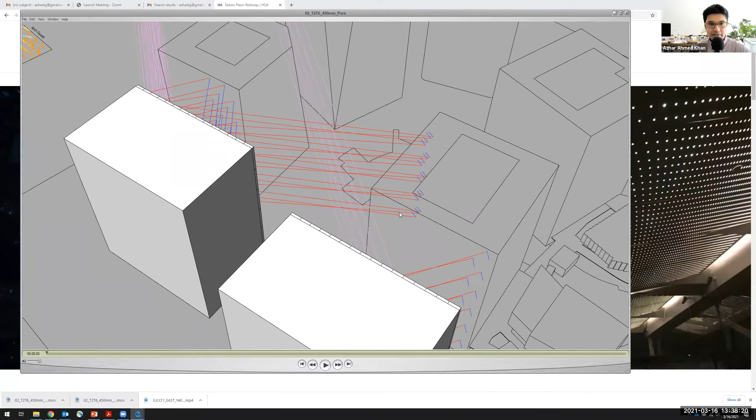So here's, for example, a tower, right? These are all different office blocks coming together. And here's another set of towers, and the thing I noticed is they're really close together, and this one's fully glass clad.

My argument is you need to change the design of this facade because you're going to get a lot of reflected light in it. So how do you prove that? You can't just say that. So what I do is simulate the sun and map the color according to the amount of radiation falling on that surface. And so you start to see, oh my god, this is just reflections - this is not direct light, this is only reflected light from the facade of the white buildings that are completely glazed.

So if I go to the other video, you can see that you can actually map this. You can see the sun moving on the bottom here, and as it's moving across the sky, the temperature is getting higher, the radiation is getting higher. This serves as a map, like a facade map for those two buildings, T2 and T6, to say, hey, this is where you're most vulnerable.

What can you do about it? How can you address it? This can go to NBBJ and then they can look at it, and then it's up to them - I've done my job warning them and telling them. It's up to them to redesign it, or we can work on it together and come up with a new strategy.

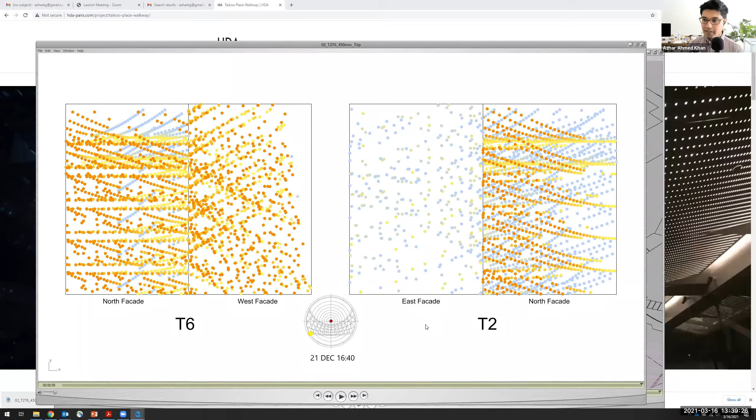Or what we did in this case was redesign this facade on the white buildings so that they deflect the light more, so they're not concentrating it in specific areas. Here you'll start to see certain bands come through - very strong bands of light.

Hot spots. I think there was that famous building in London that set a Jaguar on fire because it acted like a magnifying glass - the walkie-talkie building. It just concentrated light on a car and melted it and burnt it. That's not safe, right?

Yeah, constraints - there's a lot to do with constraints.